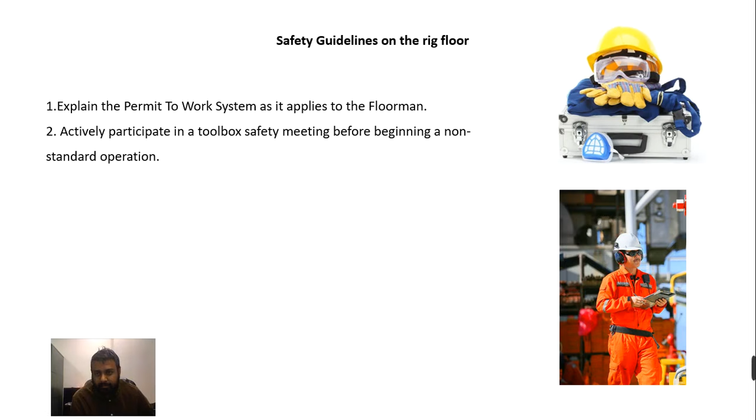If any accident happens, you need to know where the first aid box is, where the other safety toolbox is. So you must be aware of the situation at the rig floor, what is going on at the rig floor, and which equipment is located at what place. You must know all the tools and equipment. And if you see any life-threatening steps taken, or if you see that some action you are doing may threaten someone's life or your life, stop it.

So you can do three stop cards per week, depending on the company policy. Also immediately report to your supervisor. If you see something happening which can take a life, stop it immediately. Usually at the rig site, they do trainings and systems in order to make sure that safety is our first priority.

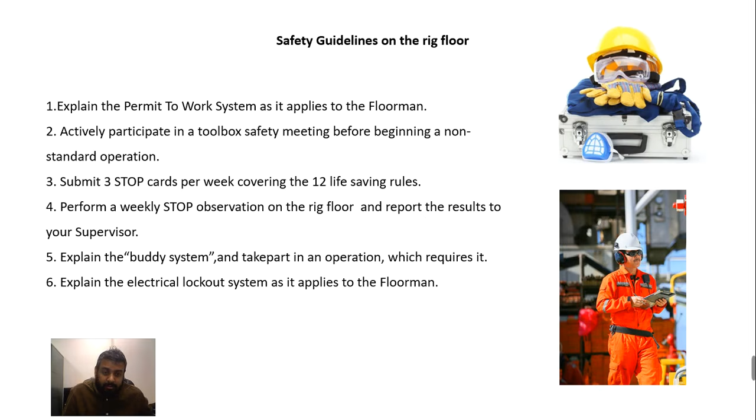So follow those training programs that they are following, and make sure that whatever electrical equipment is going on, no water touches it. They are safe and there is no problem with them.

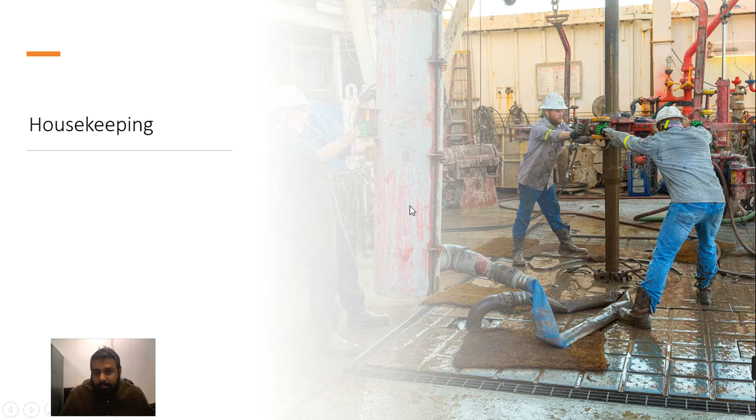Finally, the most important safety part: because you are drilling, there is a chance that H2S gas might come out of the hole. Now H2S is very toxic; it can kill people, and it actually did kill people before. So you need to be careful of any H2S, or any fire incident or any blowout. So you need to be careful at the rig site, and you should know how to handle those safety situations.

So as I said, safety is priority. This safety is for everyone. It's not only for floormen. Those who are working there, they all should follow these kinds of safety rules at the rig site.

The second most important thing for you as a floorman: you have to keep this area clean. We call it housekeeping in simple words. Keep the floor tidy. Now, why are we doing it? If it is slippery, somebody may fall, and if some toxic chemicals are coming out, it can cause problems for human life. So we don't want any spillage around. We need to keep the area clean.

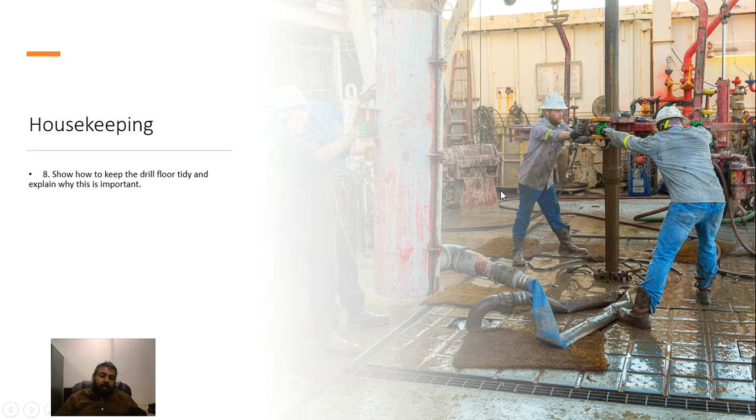And since you are making a connection to the drill pipe, the drilling mud will always come out and fall on the floor. You have a mop and keep mopping that area. On the other side, drilling mud has some chemicals that are not environmentally friendly. So if any spillage of mud occurs, it needs to be cleaned. You have to make sure the floor area is clean, has no toxic material on it, and everything is fine.

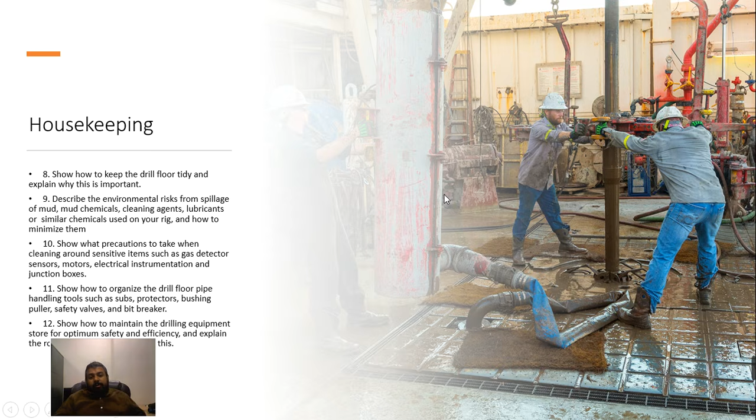Another thing is you must know where the gas detectors are located, where the first aid box is. You have to organize all the tools; you must know what is located where. You can see where the bushing is, where the safety valves are, where the bit breakers are. Make sure all your equipment is organized, not randomly placed here and there, and easy to access from all places. So that will be your first job: to organize and maintain a clean, safe environment on the rig floor.

The second thing you are going to do on the rig floor is know what equipment is available on the rig floor. First of all, the most important one is these tongs. You see these red ones? These are tongs. These tongs are used to make a connection or break a connection. If you are connecting two different drill pipes, you are making a connection. And if you are breaking them, pulling out of the hole, then you are breaking a connection.

So as a floorman, you must do this job. This is your main job. Make sure you know how to operate them. Once you go, you will get training on how to use those tongs and how to make a connection, and that's what you have to do.

Each pipe is 30 feet, so when the drilling continues for 30 feet, you have to put in a new pipe. So you have to follow that at the rig floor, and make sure you do it in a safe way, so it does not harm your life or someone else's life. They will provide you proper training for this.

Then, on the rig floor, you must avoid all kinds of accidents. If there is any moving machinery, accidents can happen. Somebody may fall. The drilling line may collapse. The swivel may fall down.

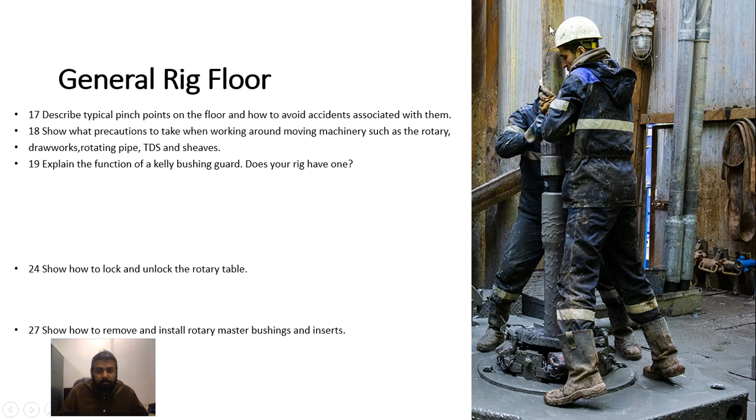The rotary table may... So there are a lot of issues that can happen at the rig floor. So you must make sure that you keep an eye on everything, so that everything is safe and so on. On this side, you must know all the types of equipment they use. For example, how this pipe reached here, what is holding it, and how to use that equipment. So you must know all the functions of all the equipment used at this point.

And you must know how to use the air hoist. Air hoist means how this pipe reached here. This pipe is very heavy. Just to reach here, you cannot do it by hand. So you have to hold it from one place using those air hoists, bring it here and then connect it. So you must know how to use those air hoists and their gearbox and tools. How to use chains, how to do proper doping and make those connections, connecting those pipes at the rig floor.

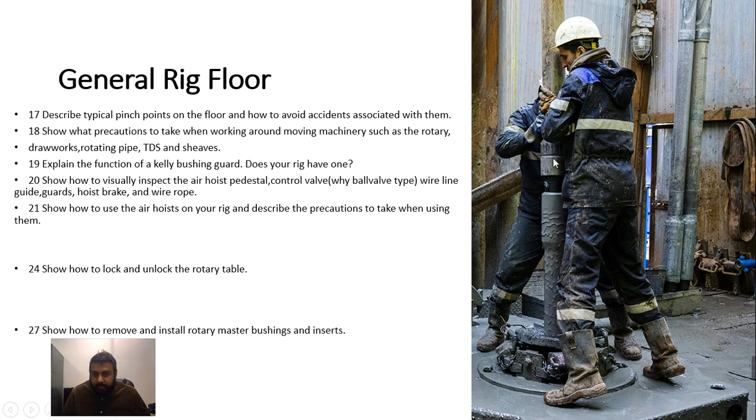And the other thing is, you have to make sure of the correct procedure for the rig up. When you are setting up the rig, what is the correct procedure, how you connect all those parts together to start the drilling process. Okay. And now the second part that you will take care of, as I said, you have to connect those pipes. These pipes are basically part of this equipment. We call it a drill string.

Now this drill string is composed of different pipes. We have drill pipes, and then we have the drill collars. Both are pipes, but this one is heavier and this one is light. The function of the drill collar is to provide the weight on bit, because unless you push the bit, how can you drill? So we need weight on bit so it can push the bit and drilling can proceed.

But of course we need to reach depth, and we cannot use those heavy pipes from bottom to top. It's going to be very expensive and drilling will not be feasible. So we have lighter pipes, not heavy like the drill collar, and these pipes provide the length. That's how they constitute the string. The drilling engineer will actually design all of this for you. You just need to connect them.

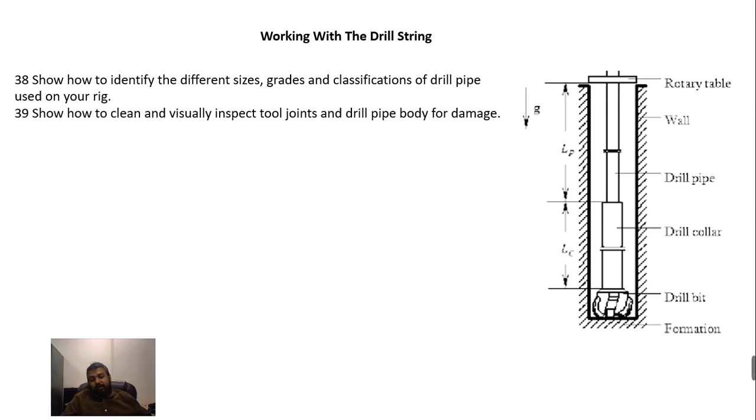On the side, you have to keep looking at them. When you use them, when you connect them, make sure that they are clean, there is no defect, no leakage, no crack, and the body is not damaged. Because if it is damaged or breaks down inside the hole, then you have to do the fishing job, and it takes time, and time is money on the rig. So make sure the pipe you are using is safe, not damaged, and can sustain all the loads the drill string is taking.

When you make a connection like this, you put dope on it. Dope is a liquid that you apply to make a connection so it does not leak. Make sure you do not overdo it or underdo it, based on your experience. Then, these pipes are heavy. You cannot lift them by hand. So you need equipment, chains or elevators, to lift them from one place to another. So you must know how to use those elevators when you manage the drill string.

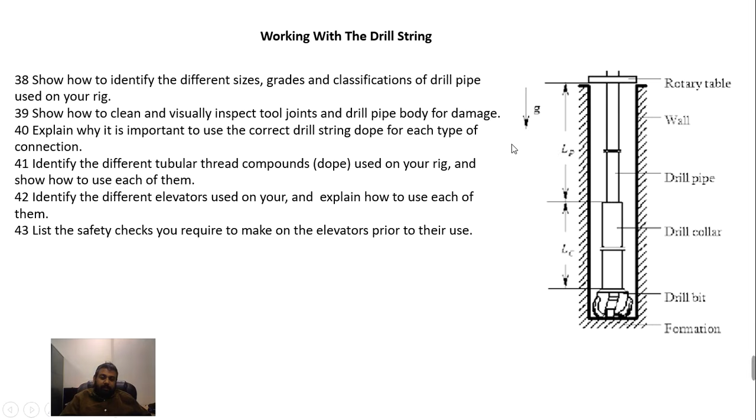Definitely, you must take care of the safety precautions working there and so on. Once we make a connection, something like this, we need to put a slip here. This is a new pipe we are adding, but this pipe is inside the hole. We don't want this pipe to fall down, so we have to control it through the slips. Okay, so we use the slips to control them.

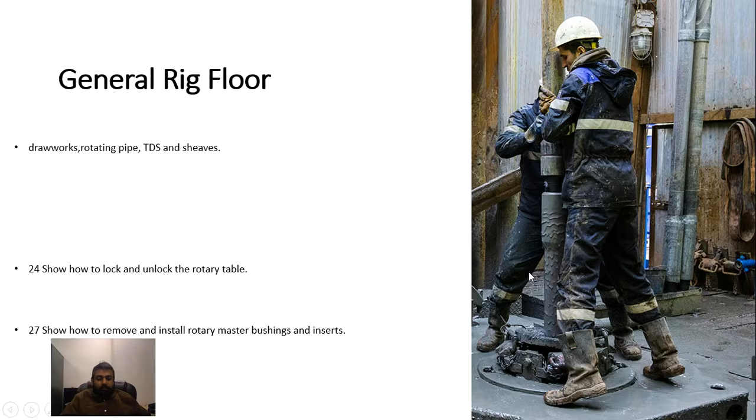And how do we make the connection? We use those tongs like this to make a connection. So make sure that, yeah, this will be your main job: just to make a connection, break a connection on the drill string while keeping everything safe, clean and organized on the rig floor.

Let's move ahead. Once the drilling is done at a certain depth, the drilling engineer will come and say, hey, let's do the casing job now. Now casing is again a pipe. It's big in size. We put it inside the hole. We don't want this hole to collapse. Something may fall down from here. Maybe fresh water is coming from here, so it may fall down and close it. Then we have to drill again, and even drilling cannot proceed because the drill string can get stuck, and that's another issue that drilling might face.

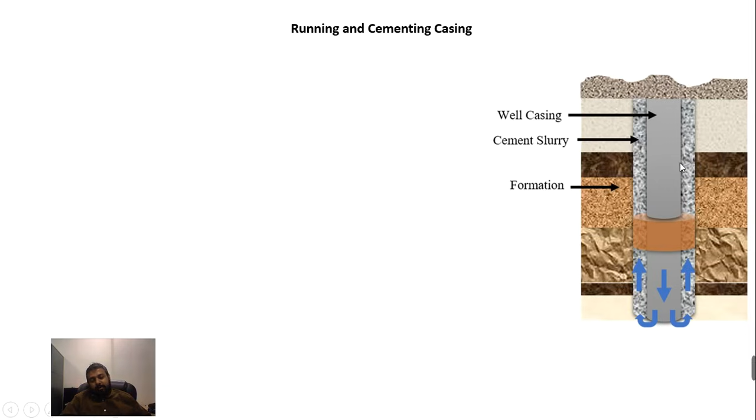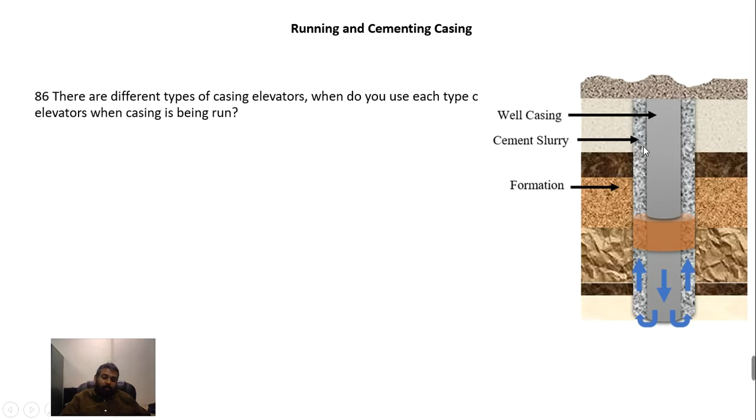So what we do, we drill to a certain point that our drilling engineer tells us. We drill it, then we case it using a pipe, and then we cement it also. So we make it cemented, like we fix it with those casings. So that's what we do. So you as a floorman must know what kind of equipment you are going to use to do those casing and cementing jobs. You will be assisting those who are working on those jobs from service companies.

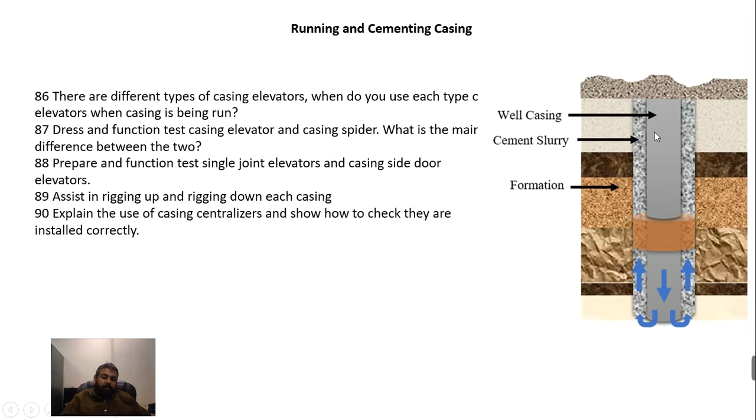And you must know what kind of casing is running, what kind of equipment is needed, what kind of elevators are needed while running those casings inside and so on. So you will be dealing with the casing job also at the same time. Centralizers, you have to keep it in the center here. That's one of your jobs. And then you are circulating the cement. Where's the shoe, collar and so on.

So it's a separate topic, how to do it. But for you, you must know which kind of equipment you are dealing with there and so on. So you must help those service company guys with shoe and float collar tests, all kinds of testing they're trying to do there and so on.

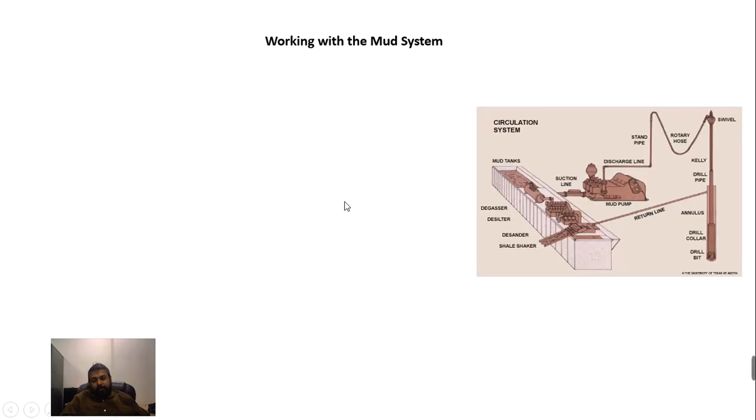So your third job will be working with the mud system. Now mud is the heart of the drilling program. Without mud, you cannot proceed. For example, this bit is cutting those rocks. How do these rocks come out? If you don't take those rocks out, how will drilling proceed? Drilling cannot proceed without removing those cuttings. So these cuttings are removed using the mud system. And this means the mud will be contaminated by those cuttings. We have to clean it.

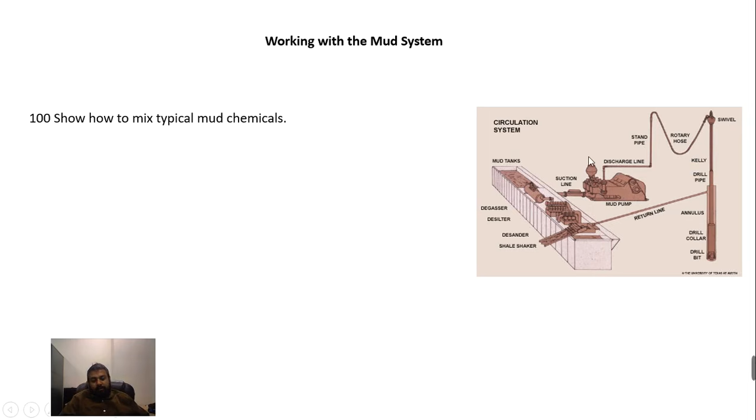So it's a continuous circulation system where the clean mud is here in the mud tanks. Through the high pressure pumps, we send it through those pipes inside the drill string, and it lifts the cuttings and then goes back here to the shale shaker. The shale shaker has a vibrating screen where the cuttings are removed, sand or silt is removed. If there's any gas, it is removed, and then clean mud goes to the mud tanks again, and this is a continuous circulation system that is going on here.

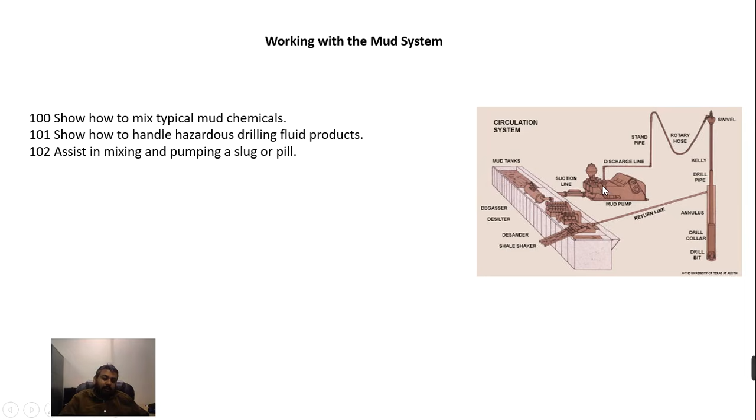So at the rig floor, maybe there's a drilling mud spillage. If there's a mud spillage, how are you going to manage the hazardous drilling fluid material? How are you going to manage those pumps if these pumps leak? You must know how to maintain them, change liners, seals, small seals. All the training will be provided to you. So you must make sure that pistons, liners, cooling fluid, spray nozzles, everything is in order, because if this mud system goes out of order, drilling will stop immediately and it will not continue. So you must know how to handle them.

So you must assist in changing out the mud pumps, the piston, liner, and discharge, and so on. Okay, then if there's extra pressure developing in the mud system, you must know how to remove that extra pressure and so on, and remove those sanding and desilting.

The most important task will be well control, because you will be the first line of well control defense. What happens sometimes when we drill, very high pressure oil or gas tries to come out and blow up everything. So this we don't want, because if the high pressure oil or gas comes out in an uncontrolled way at the rig floor, you are done. The rig will catch fire, because you are dealing with hydrocarbons which are flammable, and it is very high pressure. So those who are working on the rig floor may face a big problem here. So we don't want this.

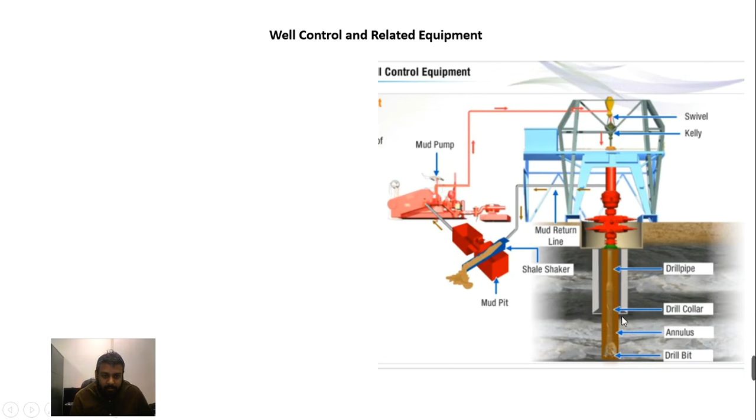So you will be provided training by the International Well Control Forum, and everybody working on the rig site has those trainings. You will also take them, and you must know how to control the well. The first most important tool for well control is this BOP stack, the red equipment that you see. And the second thing is you must know where the diverter is, so you can divert any high pressure gas or oil coming here away from the rig site. And there are some procedures.

If a kick happens, this is called a kick. If any uncontrolled oil or gas is coming out of a hole, we call it a kick, and we have to control it. So you must know how to control that kick for your safety, for rig safety, and so on. And also you must know how to make a connection. If you have to stop, close this BOP, how to do this. So you must do proper training to do all of this, maintaining the well control.

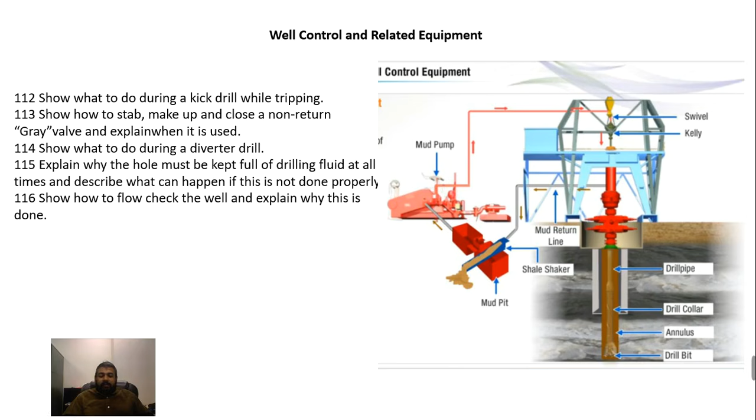Because until you reach the drilling engineer, your advisor, and so on, though they will be informed, you will be the first line of defense for this well control. So you will have some authority to follow some procedures until maybe you can kill the well right away there with those high pressure things. And then if those packings leak here at the BOP, you must know how to change them. So make sure you know how to do the maintenance of BOP stacks. You must know how to do the maintenance of the pumps. You must make sure that everything stays clean and so on.

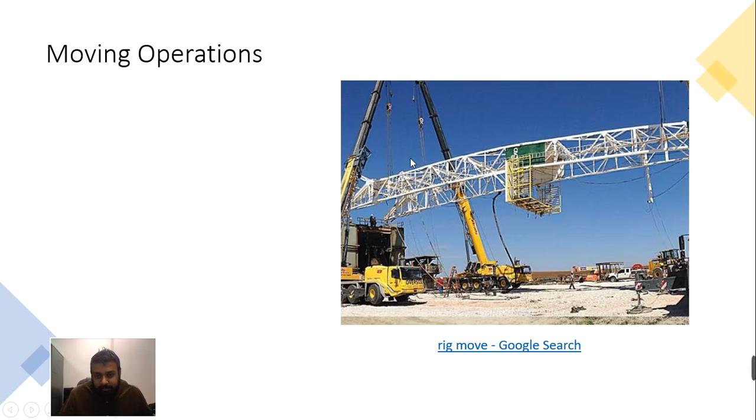So finally, overall, once your drilling is done, you need to move this rig to another place. So you must assist the tool pusher to take out this rig and move it to some other place, and help them move it. For example, look at this rig structure. It has to go straight, put on the rig floor, set up all the parts together to perform the drilling job. So you must assist in lowering or raising the mast, assist in disassembling or reassembling the mast, and so on. So these are the main tasks that you are going to do.

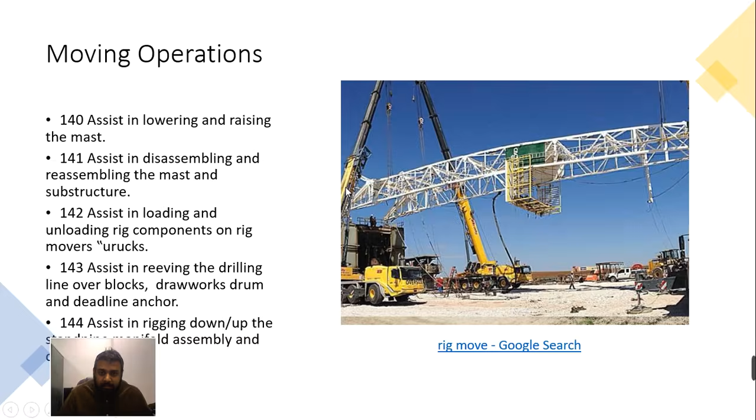You will be mainly working with the drill string, casing, mud system, and the well control. Okay, these four main tasks you will be doing there, and you will be provided training with the seniors or those who have experience. They will teach you how to do all of those things, and then you will be independent to perform all of them. In the end, if the rig is moving, you must help the tool pusher to move and assist, and so on. So that's all for today's lecture.